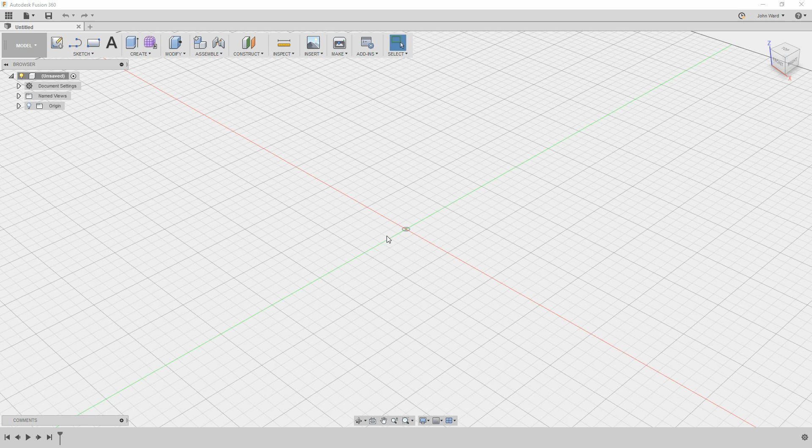Now what we've got here is Fusion 360, and this is the default view when you've just opened up a new project. The first thing we need to do is to actually draw the base of the machine, and this is essentially just a rectangle - basically a sheet of melamine faced chipboard. So we're going to start by going up here to the left, and we're going to pick a rectangle because that's what the machine is, and this guy's going to do a center rectangle.

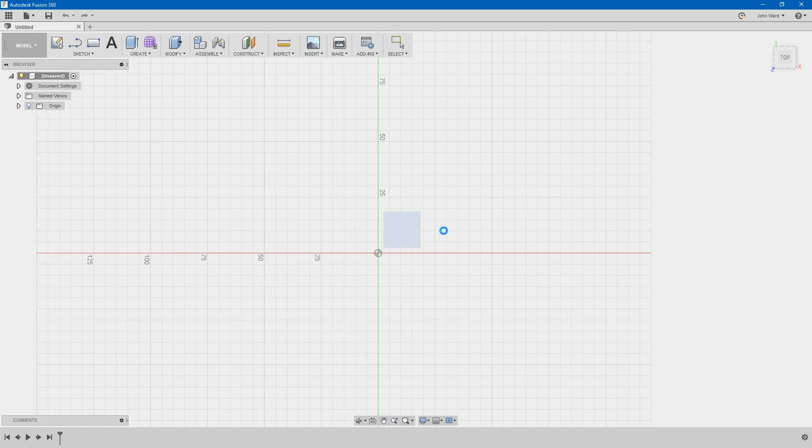Now we have to pick which plane we're actually going to draw this on, and we've got a choice of 3, as this is of course in 3 dimensions. So I'm actually going to select the base here, and we'll see it will just move into that automatically. So this is actually the XY plane, because the thing is on the base of the machine. Also the Z is the vertical in this case.

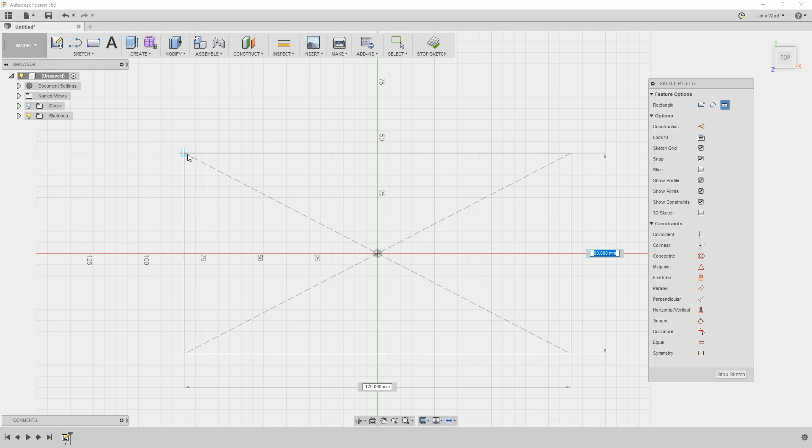Now for this rectangle I just need to place the centre, which we're going to place at the centre of the origin. So we'll just click there, and then we just drag out, and we'll see we have a rectangle. Now we can actually type in the sizes here, so the sizes we want in this case - the height is actually 740 millimeters, and the width of it is 1110 millimeters.

So just press enter there after entering the dimensions, and we can obviously zoom out and see we've got our rectangle. See the edge is actually black, which means it's now what's called fully defined, which means we've actually specified the actual dimensions of both sides. If it wasn't black, then it means we haven't actually done that yet. So 740 that way, and 1110 in the other direction, and that's basically the size of the base of the machine.

And in order to find out the size, you just get out a tape measure and actually measure the thing. It really is as simple as that.

Now there are 3 other elements I want to draw in here, which are the supports that go across the ends here, and also in the centre. Those are also rectangles - strips of steel which go all the way across to support the base. These are also rectangles, so we can draw those in with the rectangle tool as well.

So we've got the rectangle there. In this case we'll use the 2-point rectangle, which will allow us to line this up with the one we've done already. If we move in at the top left corner, you'll see a blue square appear, meaning it will snap to the corner we already have. We can click there and move down to the bottom, and we'll see a little cross at the bottom, meaning again it's snapped to that position.

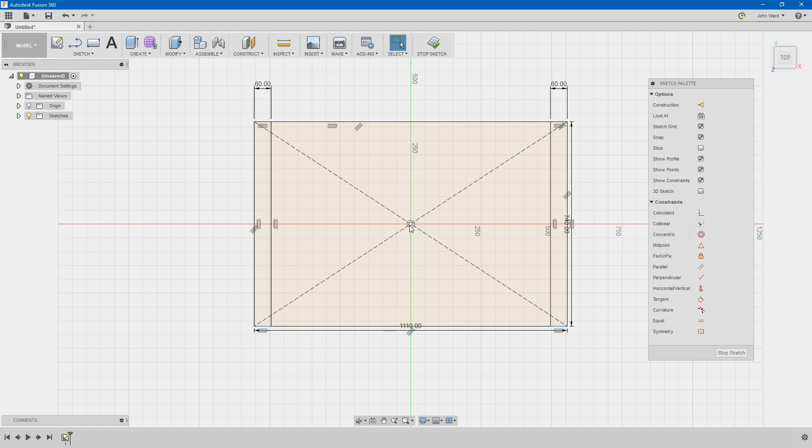Then we need to do the one in the middle, which is centered, so because we started the other one in the center, we can do likewise with this one. We'll go to rectangle and use the center rectangle again, starting in the center, then expand out. The width is going to be 60, and the height is already 740 because we snapped to the top line. So we type in 60, press enter, and we have the 3 pieces defined.

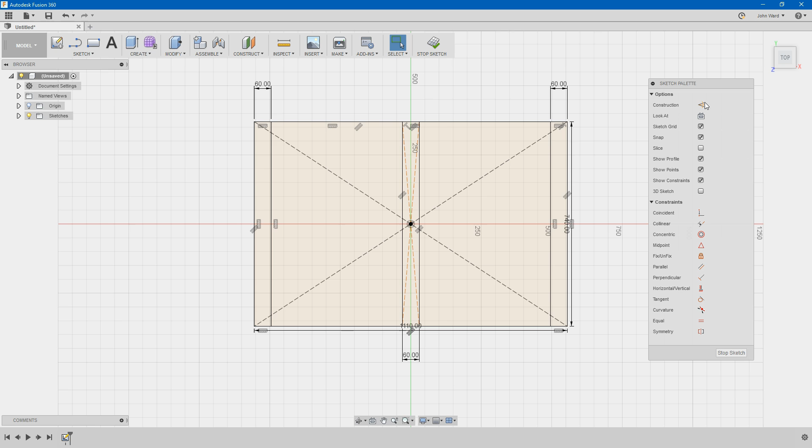That's it for the base of the machine, so we click over here on the side panel and put stop sketch, which finalises what we've done. It's zoomed in rather a bit, so we'll zoom out. This is the base of the machine - the rectangular top piece - and then we've got the additional 3 rectangles which define where the pieces of steel are underneath.

Now in reality the bits of steel actually extend beyond the base here. That doesn't matter because we're not concerned with that, and we could in theory model up the rest of the machine as well, but again we don't really need to do that.

Now at the moment we've only got a flat sheet, so we need to add some thickness to this. We need to extrude this to the thickness of the base, which in this case is 20 millimeters. To do this we use the tool - we could go up here and find it, but the keyboard command is actually Q, which brings up press pull.

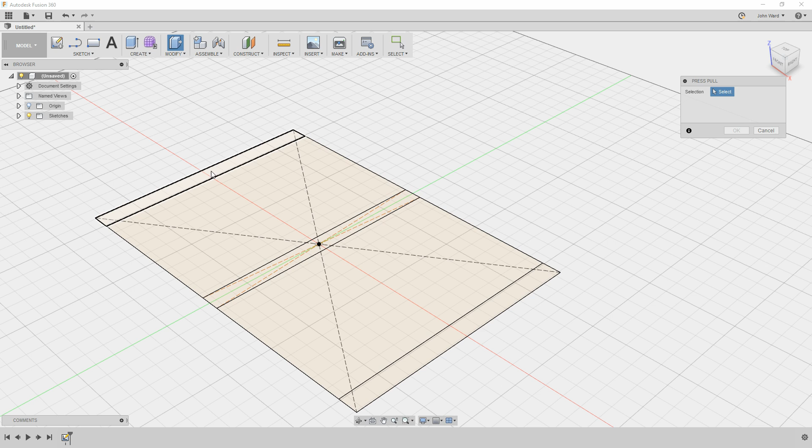It says selection, so it's asking us to select what we want to extrude. We'll select this one, and in fact all of them on the bottom because they're all basically connected. Then we can pull on this little thing here, which moves it upwards as required, and we can type in the box the precise distance we want - in this case it's 20 millimeters.

Press enter, and there we have our base plate, which now has some thickness to it. If we rotate that, you'll see it's basically 20 millimeters in thickness, and of course the size that we defined earlier.

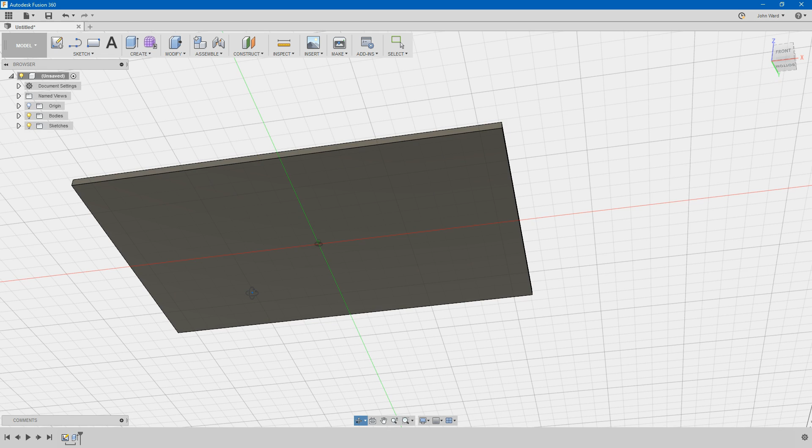And we can also look underneath as well if we wanted to, and you'll see it is centered on the origin there which we started from initially. Just click the little home thing up there, that will go back into place like that.

Now the next thing we need to do is put some holes in it, so we can of course drill the holes in. That was the whole point of doing this. So first we need to draw one of the holes, and holes are round, so we can do a round circle, and that's actually C on the keyboard.

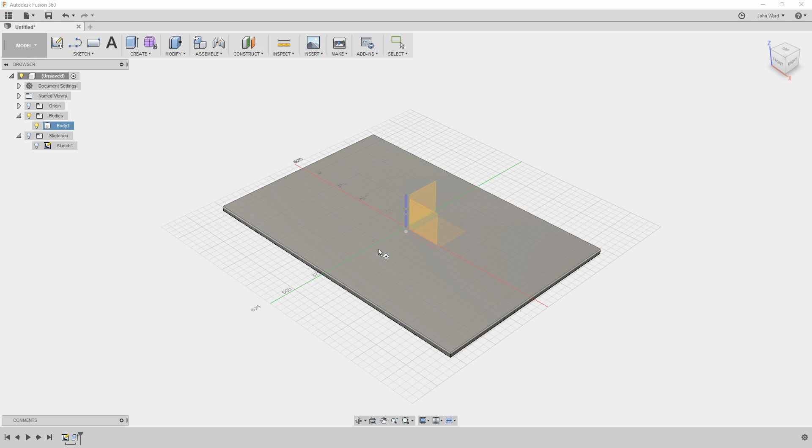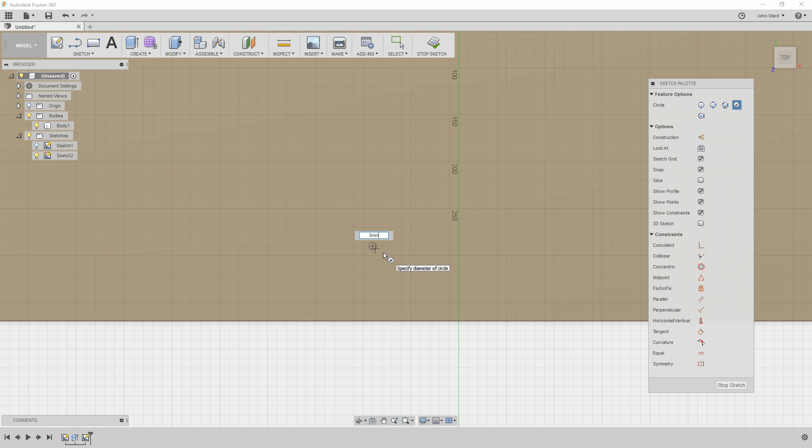So if we just click on there, and then select the object in question, it automatically goes to that particular view. If we zoom in a bit here, we can draw the circle just by clicking here and then dragging, and you see we adjust the size. But we know it's going to be an 8mm hole, so we can just type in 8mm, and then we have our 8mm circle, which we've just drawn on the top there.

Now at the moment that's just an 8mm circle floating about in the middle of nowhere, so we need to specify exactly where it's going to be located. If we go over here to the left, we can turn on that sketch that we had previously. We can just see it peeking through underneath.

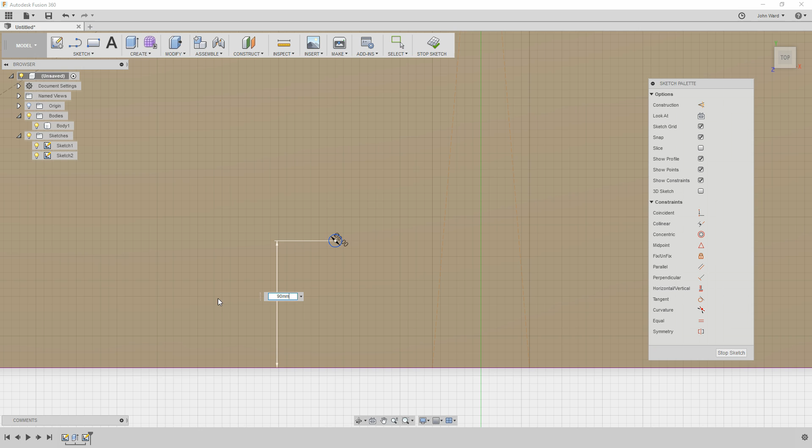So if we now press D for dimension, we can click on the circle and then click on the edge of the actual material, and then we get this dimension thing showing up here. We can position it wherever we want, so over here will do fine. The distance we want here is actually 90mm, so type that in and press enter. The reason for 90 is that the piece of material is 740 wide, and if you divide that up into 80s you get a certain number across with 90 at each side, so that'll make it nice and symmetrical on the other side.

And then we need to specify the dimension across here as well, because again it's just floating there. So again we click on the middle, and because we turned on the sketch we did earlier, we can just see it showing through from underneath. So click on that one, and again there we've got our dimension here.

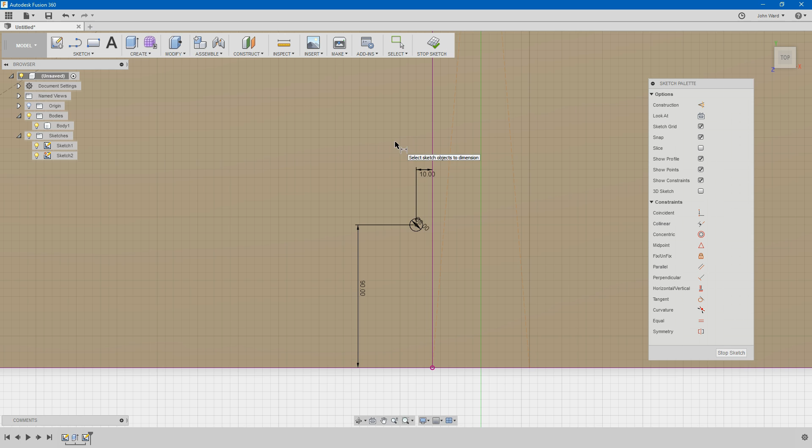In this case we need to type that in, and it's going to actually be 10mm, and you see it automatically moves into position. The reason it's 10 is because we want these at 80 spacing, so we have a 10mm space here. This piece we can see underneath is the 60mm wide piece of metal, and then when we put another one on the other side it'll be 10mm there, and that will give us the 80mm between and avoid drilling into the metal piece.

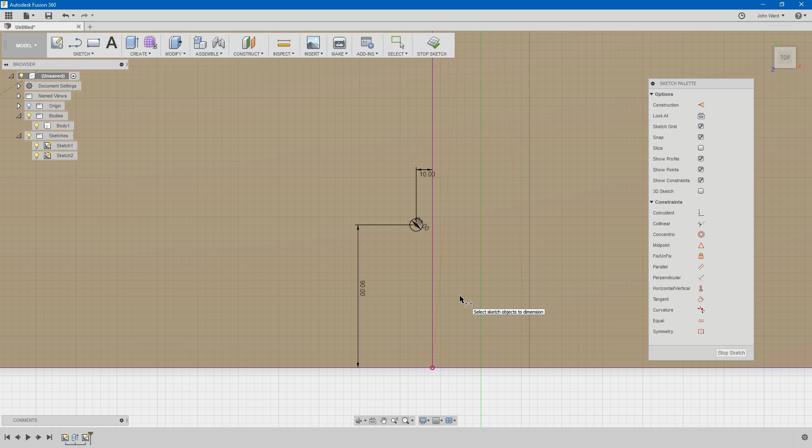So that's the end of that one, so we can just click on Stop Sketch over there, and then that just goes back to what we saw previously. And if we turn that on, we can see there's the little hole we just drew, and the various things underneath we drew previously. So that's all working as you would want.

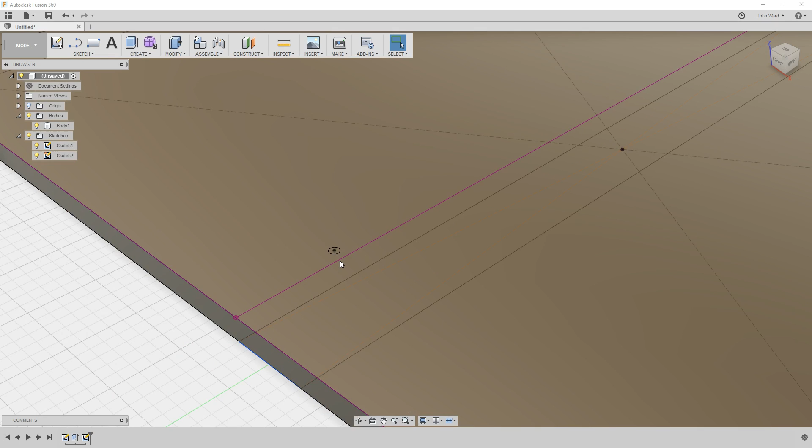Now, of course, that's only a circle at the moment, it's not actually a hole, so if you go and look at that, you see it's just a circle on the top, there's no hole involved there. So we need to make that into a hole, and we can use the Q command again, or press pull, so just press Q like we did previously, and if we go in there, then select the circle that we made, and now we can actually turn this into a hole.

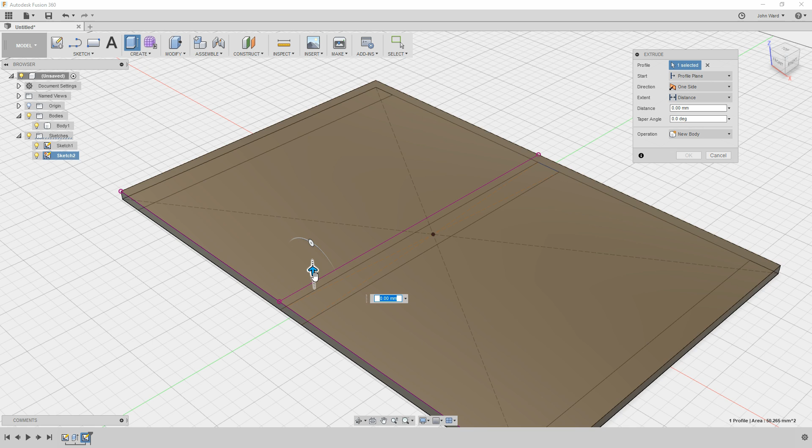Now, the arrow is actually for the direction, so if we scroll in there, we don't want to pull it upwards because that's basically the wrong direction, so we go down through the material. We could just leave it at -20, as that's the thickness of the base, but if we go up here to the panel on the side, it says extrude, and we're going to start at the plane, which is basically on the top where we drew the thing.

Direction is one side because we're just going in one direction, and instead of having distance as extent, what we can actually do is put all. We could have also used 'to object' in this case, but we'll use all, which means it will go all the way through all of the objects or things it finds in the way. So that will automatically go all the way through. We don't have to necessarily type in the dimension itself.

Now in this case it doesn't matter at all because we've only got one, but if it was a more complex thing with dozens or even hundreds of different components, by specifying that, then if we change the dimension to say the thickness of this, all those holes would update automatically. We wouldn't have to go in and amend them individually.

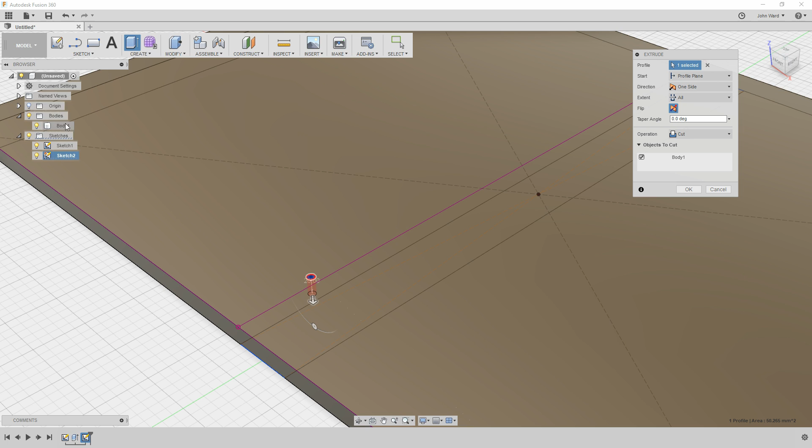Operation at the bottom is cut. There's some others there which we're not using here because we basically want to cut the hole through it. And the objects to cut is basically the thing we're cutting, which is this body one we made earlier. It's the base of the machine. So we can just click OK there.

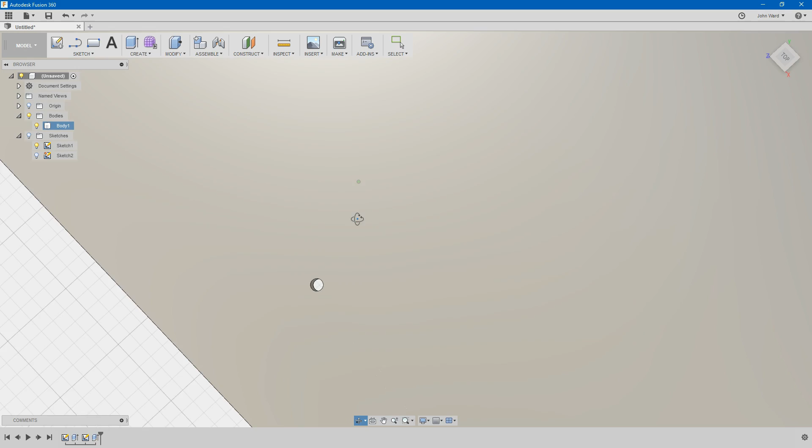We can then turn off the sketches because we don't really need those anymore. And now the circle we had is now actually a hole, so if we zoom in there, you'll see there's actually a hole that goes all the way through. If we just rotate the model, we can see through the hole to what's underneath. And if we look at it from underneath, there's the hole going all the way through.

Now one hole's all very well, but we need a lot more of them, and we could draw them all individually and align them up carefully, but that's going to take far too long. So press S on the keyboard and then we can search for a pattern command, and we're going to pick rectangular pattern. Now it's obviously a rectangle, and then we get the pattern box up here.

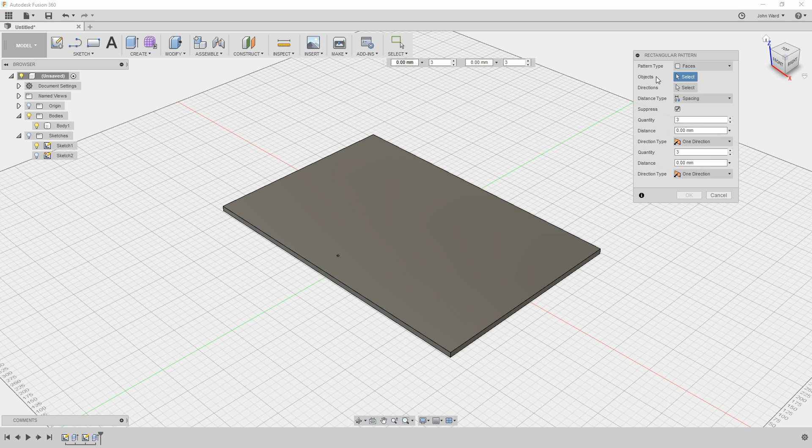Now first of all we need to select what we're going to make a pattern from, the object, so in that case it's going to be that hole we just made. So just zoom in a bit and pick the hole. In terms of these, this is how far apart they're going to be, or the space between them, as we've got spacing here, and then how many we actually want.

We also need to select the directions we're going to go in, so we'll just say that direction and this direction, as we want two directions. So we're going to go for the spacing as we had before, 80mm, that was also the whole point, and we'll go 80mm in that direction.

Now it starts out with 3, and we'll see that these are actually going in the incorrect direction here, so rather than 80, we'll just change that to -80, and you'll see it goes in the other direction.

Now I'm going to leave that one at 80, but if we change the other one in the side box here to 80, it will then go across the plate like that. Now we need obviously more than 3. Now this thing here, by the way, and these up here are basically the same. You can just do it there or up here, it doesn't actually matter.

So we need to increase the quantity that we have. So for this one we'll just turn these up a bit, and you'll see it will just expand the pattern across the grid. We want to go as far as we can without going right to the edge, so that particular one is going to be 8, like that.

Notice that says one direction on both of these. Now that's fine for the direction here, but the other one we can change to symmetric. That means it goes on both sides of the starting point, so when we increase that one, see, it will fill in on both sides of the grid like that.

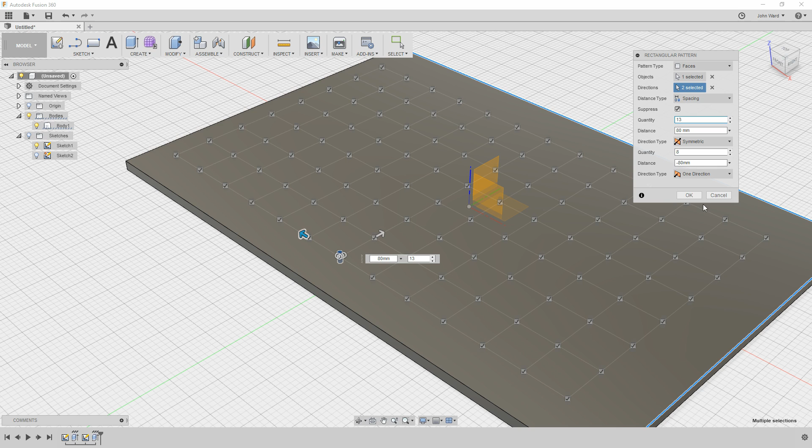Now that's pretty much all we need there, so if we click OK, then we can see we've got holes now all across the grid, and if we have a look from the top view, we can see it's a nice rectangular grid of holes, all spaced out and aligned as we would expect. And if we turn on the sketch again, we can now see that the middle is obviously avoiding drilling the holes there.

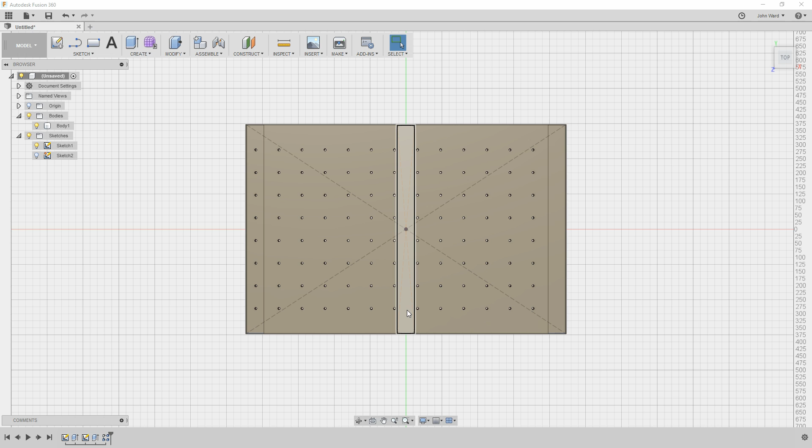It's just nicely spaced either side, as we put the correct spacing for this hole in before, and that's been basically duplicated across to all of the others. We can see all the holes there.

Now there is a bit of a problem here, because at this end we've got a whole row of holes across the top piece of the metal, and it also happens that the machine can't even reach that far to drill them, so we need to actually get rid of those.

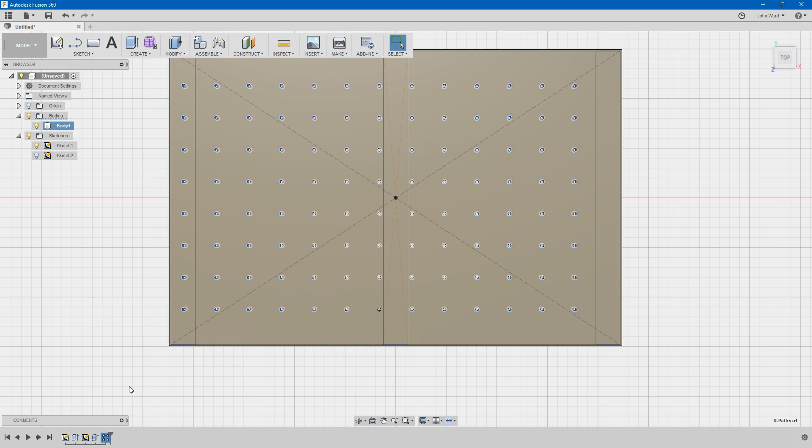So if we go down here to the bottom left, we can just click here and put edit. Now because we've got suppress selected here, we can actually just untick the ones that we don't want, so we'll just get rid of a load of these, as we can't drill there because it's obviously solid metal.

And we'll actually take out these two rows as well, mainly because the machine can't actually reach to that position, because the gantry is one-sided with the spindle overhanging. So we'll take those three rows away, but we'll leave all the others in position so that it will fill up that spacing.

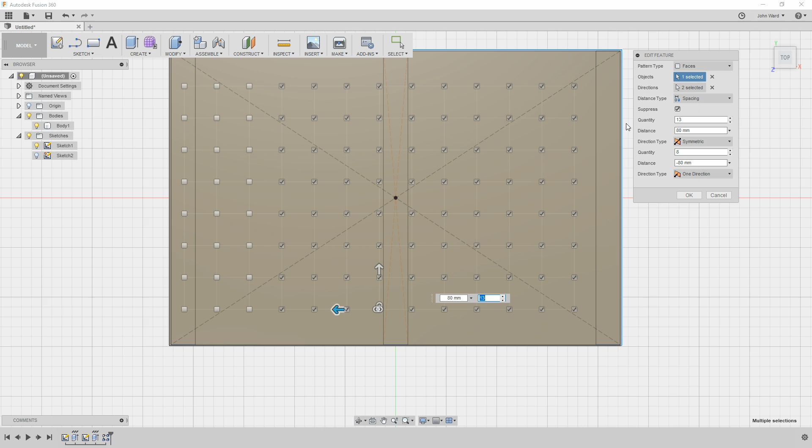And we don't want to go any further to the right here, because if we did, again it would be into that metal area, which is what we want to avoid. So click OK there, and then we get our holes in a more sensible place.

And we can turn off the sketches now and just see the whole thing as it's finished. And if we zoom in there, we can of course see that they are in fact all holes going all the way through.

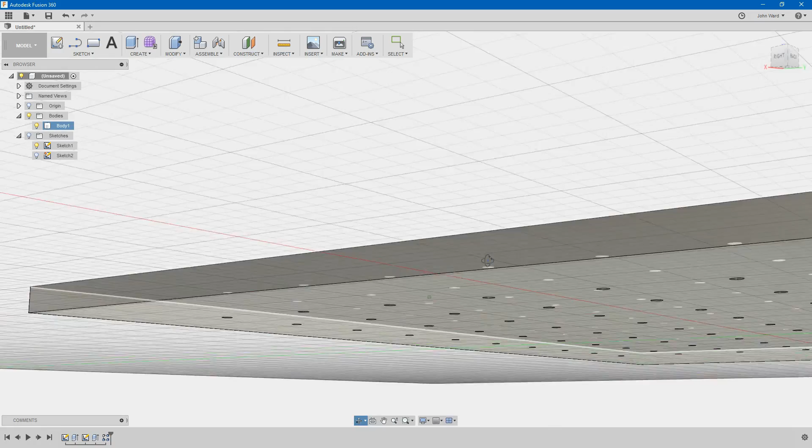And if we look from underneath, well, there's those holes again. So that's the thing we actually want to make.

And although that took quite a long time in this video, in reality it wouldn't take very long at all, because all you're doing essentially is drawing a rectangle, extruding it to 20mm, drawing a circle, extruding that through the material, and then just making a pattern to copy the hole all over the thing like that.

So the next thing is to actually set up the machining parameters for this, and if we go to the top left here where it says model, we can then change to the CAM option down here. And you see there's quite a lot of other options in here, things we're not currently using. So we'll just click on that.

Looks pretty much the same, but the difference is on the left here we've now got a whole load of different things, and this is where we're going to set up for the actual machining process.

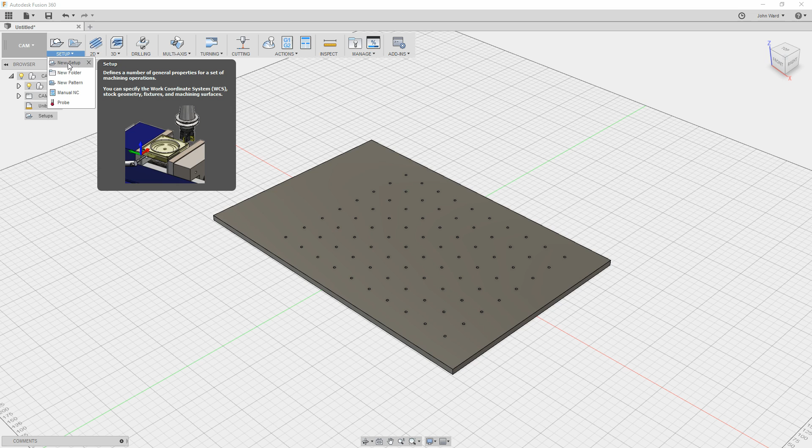So the first thing we need to do is create a setup, and if we click here where it says setup, we can go to new, and as it says there, it just defines a number of general properties. So we'll click there, and then we get this box at the top here where we can select various things.

Now operation is going to be milling. We could have turning or cutting or whatever else, but we don't have plasma cutters or lathes here, so milling it is.

And then we need to actually select some kind of origin point here, so we can then define basically which direction is which. In this case Z is correct, but Y and X are actually the wrong way round, so we need to attend to that. And we also need to select where the actual origin or 0 point will be.

Currently it's in the middle, but we are going to want to be moving that to down at this corner.

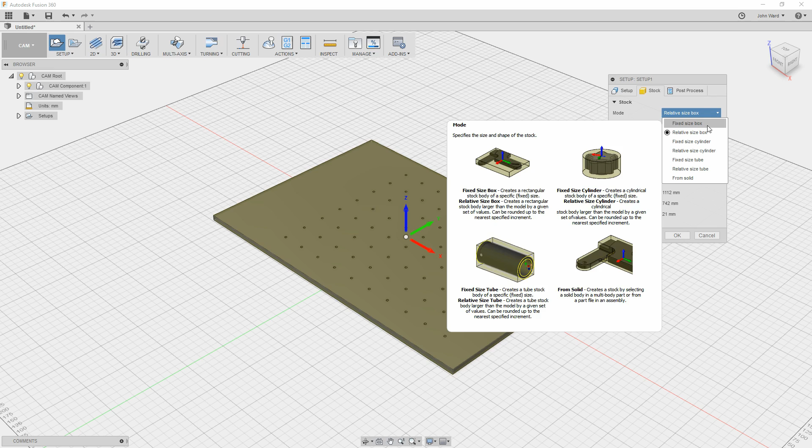Now if we go to the stock tab up here, we need to change this, because what we actually want is a fixed size box, and the box is going to be the exact size of the thing which we're making. So in this case 1110 by 740 by 20mm.

The other ones are useful if you're going to say make a part and then cut parts off of the starting stock, but in this case we want it to be the exact thing, and then we're drilling holes in it, so fixed size box is what we want.

Now for the origin we need to set basically where the middle of this thing is, which is currently in the centre, but we need to actually locate it to this hole. The reason we're going for that hole is it's easy to measure from the edge here and here on the actual machine, so we can easily locate it there accurately.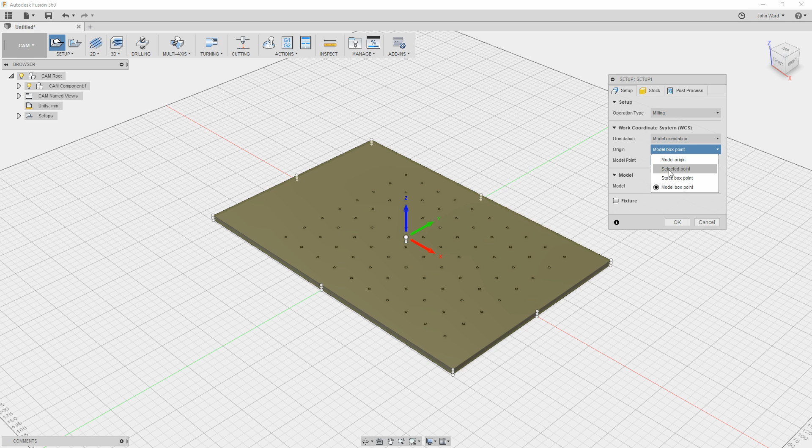So rather than model box point, we're going to put selected point, and then we can go and select. I have to zoom in a bit there. We can select the hole there which we made earlier. So just select there, and then that will basically become the 0 point. So we can line the machine above the hole and flat with the surface, and then that becomes our 0 position. Again, that's easy to get because we can simply measure from the edge here and the edge here on the actual machine.

Now the model orientation is actually slightly wrong, because though Z is in the vertical direction, Y and X are the wrong way round, so we can change that from orientation here, and select the appropriate options. So I've just changed the arrangement there, so basically X is going across the table, which is the moving direction, and then Y goes along here, and Z is in the vertical direction, and you can do that just by selecting the edges and whatever in there.

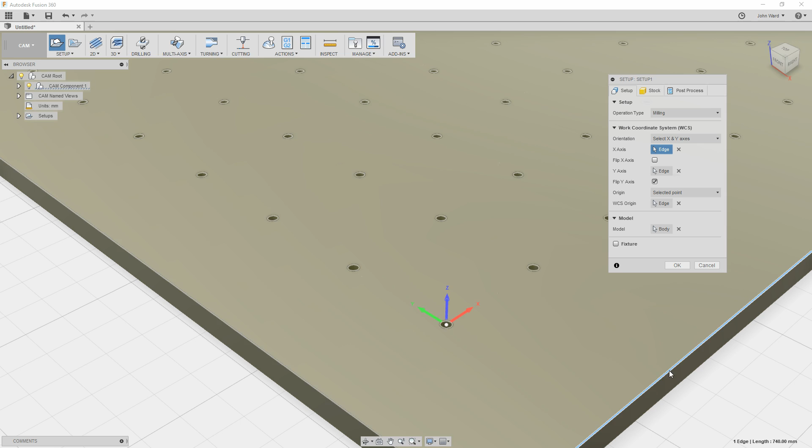And post-process, we don't have to really put much in here. You can put a program number in there, 1001 will do, and the rest of this doesn't apply, so we'll just click OK.

So now we have our piece of base here, which is part of the machine in this case, all the holes there, and this is the start position, basically 0, 0, 0, and we've got our 3 directions going in the correct places, so X over there, Y along the longer length here, and Z is the vertical direction. Now the next thing we need to do is to pick some kind of machining operation.

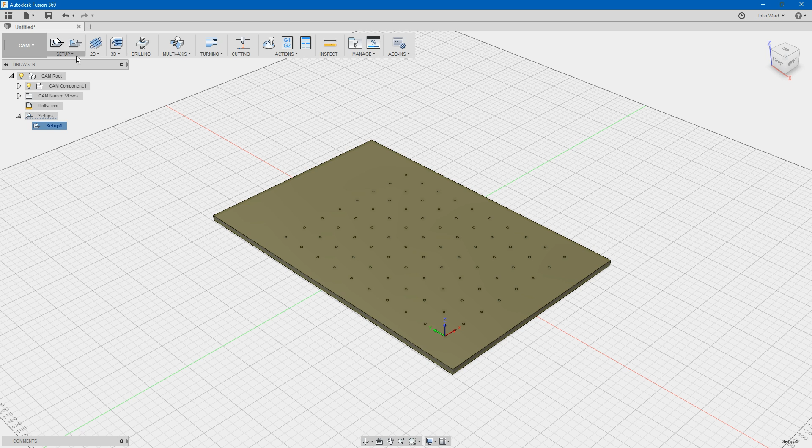There's a whole load of these up here, 2D, 3D and so on. And in this case we're going to pick drilling because obviously we're going to be drilling some holes, so just click on drilling there, and then we get another one of these things over on the right for drilling. And just as with the other ones, you've got various tabs here, and you just start on the left and work across and work down each tab.

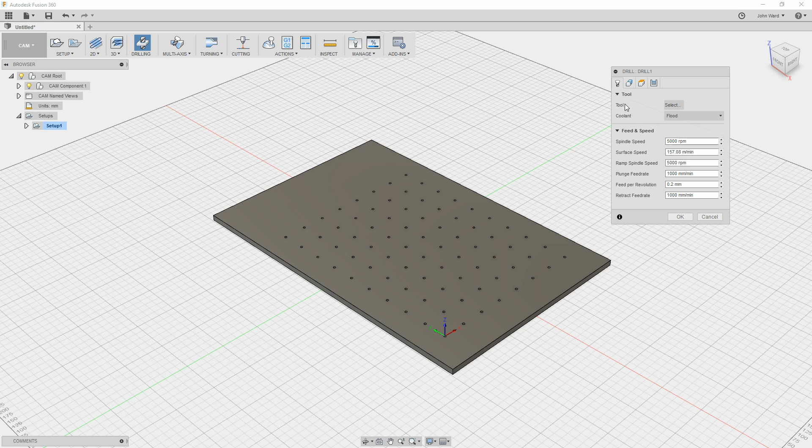So first of all we need to select an appropriate tool to actually do the drilling, so we just click on select here, and this will open up the tool library, and inside there's a whole load of sample tools and all kinds of other stuff, but I've already got one in here, a drilling demo. I put this in earlier, and basically it's just an 8mm diameter drill, and if we click on that we can then see the details over here.

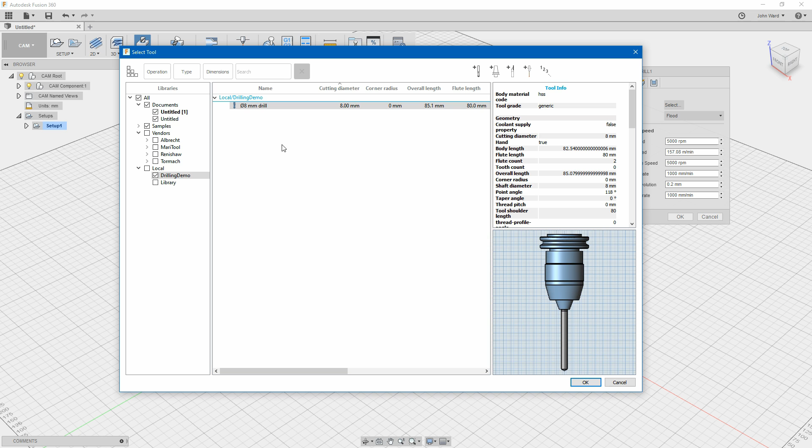Nothing particularly spectacular. It's made of high-speed steel, it's just some generic thing. It's 8mm in diameter, and then we've got various things like the length of the actual drill bit and the shaft and how many flutes it's got, which is 2 in this case, angle of the point, and a whole load of other stuff in there, most of which we don't really apply in this case, and the type of tool holder and all kinds of other stuff. There's a lot of tools that come with Fusion 360, and you can obviously add your own in there as well, and even download them from various manufacturers, but this is just a generic item.

If you just double click on this, we will select that, and you can edit your own tools as well if you want to. So that gives us the drill there. Coolant is disabled because we don't want any coolant. This is a piece of chipboard we're drilling, so we don't want any coolant flooding, and the machine hasn't got it anyway.

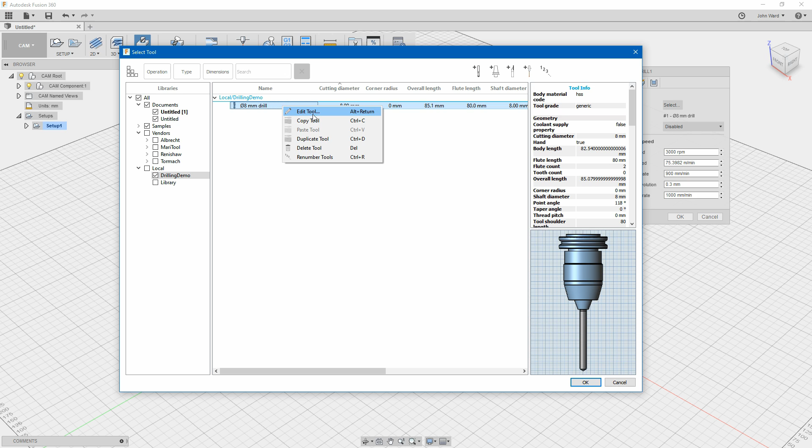And then in here you've got the various speeds, so the speed of rotation is going to be 3000 RPM, and it's going to plunge in the material at 900mm per minute, and some of these are also calculated from the others. And these are actually set up in the tool parameters, so if we go back to that tool, and if we edit tool, then we can see in here that it's all defined already, so this is just basically a generic 8mm drill which I picked from the library that was there already.

So you see it's now put the little drawing of the tool on the model we have there.

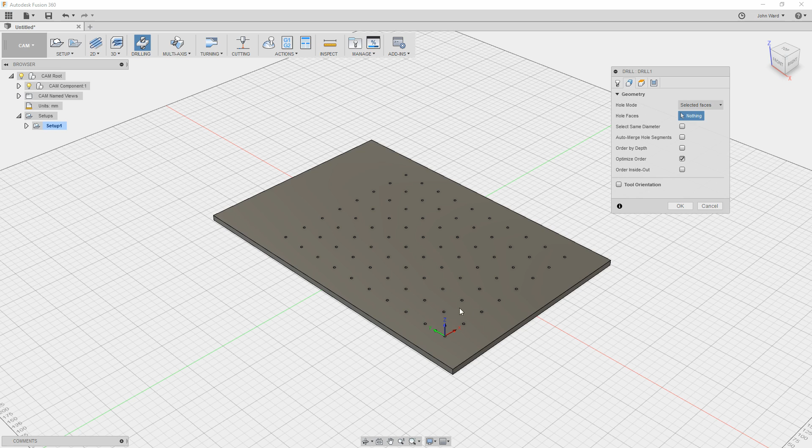Now moving on to the next tab, which is geometry. This is basically selecting what it is we're actually going to be drilling. So we've got the thing we're going to drill with, now it's a question of what are we going to drill. Nothing is selected at the moment, which of course is useless, so we need to select something.

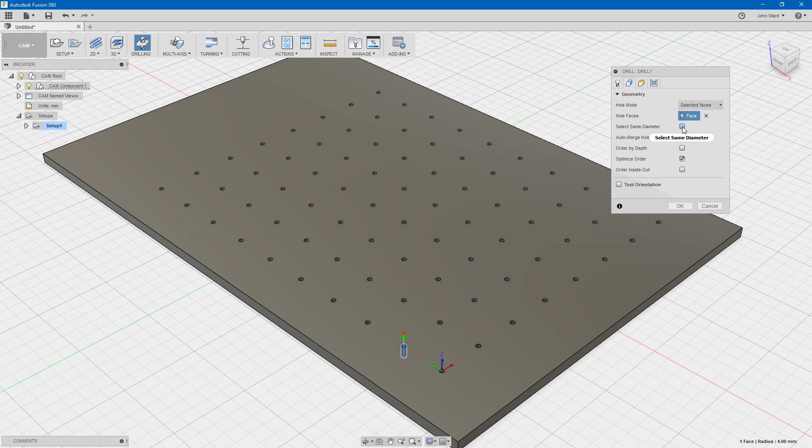If we zoom in a bit, we can just pick one of the holes. This hole will do for a start. Now we could just go and click all the holes individually, but surprisingly enough that takes too long. So over here we've got where it says select same diameter, so if we were to just click there, it automatically selects all of the holes of the same size, which in this case is all of them because they're all the same size.

And you've got some other options here as well, so most of those don't actually apply here. Optimize order is turned on, so you see it's going to start there and do these in a fairly square pattern, and then for some reason go over here and then finish there. Not entirely sure why it's put that long move in like that, but anyway.

If optimize order is not on, then it may well just pick some other weird pattern, which is certainly far from optimal because it's going to sort of go and dodge about here and do all kinds of weird stuff, although that's not actually too bad. One I had previously was literally, it looked like a complete pile of spaghetti. But optimize order should put it in a more sensible arrangement.

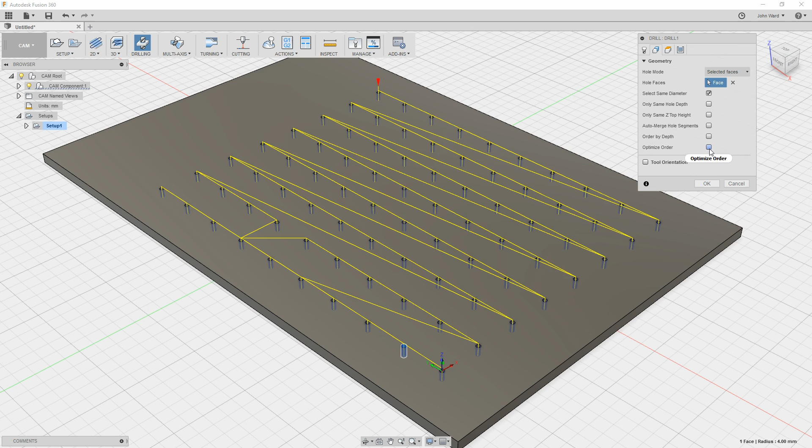The previous video, actually, when it was drilling, had the option of order inside out turned on, which means rather than starting at one edge and working across, it starts in the middle and goes around in a sort of circular pattern. It doesn't quite work because it's square, but you get the idea. And that's just an option we've got there.

And we don't need the other options there, so moving on to heights. Now this specifies the various heights that the drill is actually going to be at, and we've got a whole lot of these down the side. Now if we start down at the bottom here, the bottom height, in other words where it's going to drill down to, is essentially the bottom of the hole, which is not too surprising.

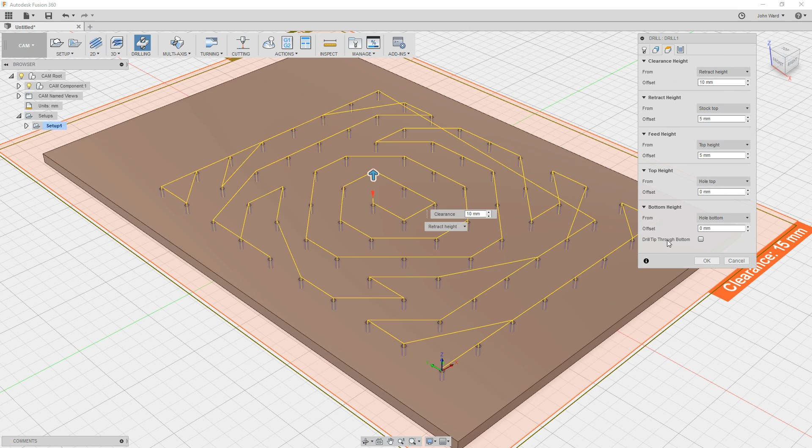You see a little diagram there, and in this case we actually want it to go through the bottom of the hole. We're going to add a little bit of an offset there, so we're actually going to put here 2mm, and if we put that in there, it will actually go through the bottom of the hole, and we can see the little diagram here. So you see there, rather than just stopping at the bottom of the hole, it will actually go slightly through the hole just to make sure it's completely cleared through.

The top height is unsurprisingly the top of the hole, so that's where we want to start drilling in. And some of these others here, if you just put the thing over, it tells you where they are from. The feed height is essentially where it goes to before it starts plunging into the hole, and that's actually 5 millimeters above. And the retract height is also 5 millimeters, so that's basically where it goes up to before it moves to the next path, as it says there.

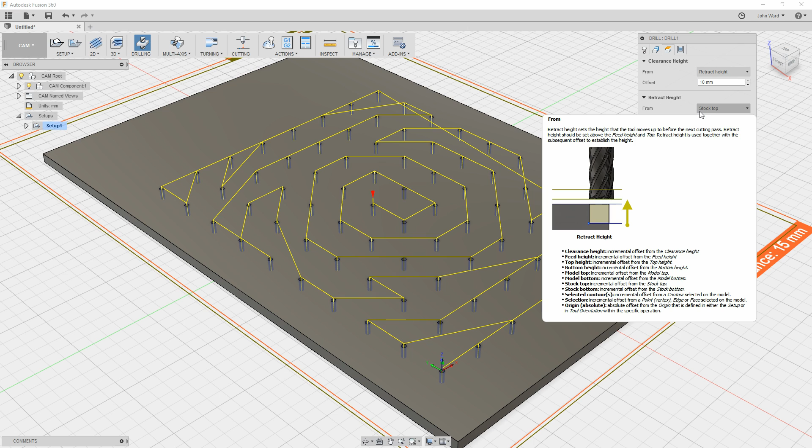Now in this case most of these don't actually matter because we're just drilling into a flat surface, so there's no issue with it colliding with the other items, but if you had a more complex shape or with 3D things on it, then you would need to make sure that that was above the height of anything else on the table, otherwise when it moved it could smash the drill bit into the side of some other feature. And then the clearance height is where it goes to when it's moving at a higher speed.

So most of those we can just leave as they are, and then moving on to the final tab, which is cycle.

And then we have some different types of drilling here. We've got drilling rapid out, and if you put the mouse over this it will tell you what all of these actually mean, so you can pick those. In this case, we're going to take deep drilling full retract, which retracts completely out of the hole to clear chips and/or flood the hole with coolant.

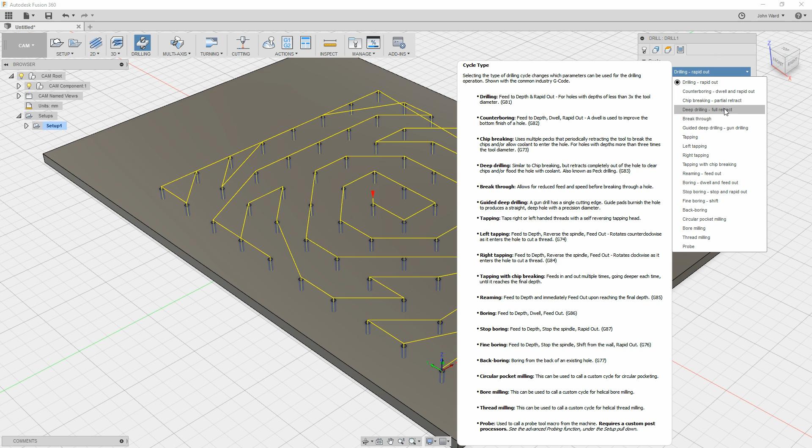If we click that, it's going to go into the hole to a certain distance, then come out of the hole, which will clear away any of the chips, which in this case are going to be shredded up chipboard, and then it will go back into the hole again to complete the hole. If it was a very deep hole, it could do that several times, avoiding it being clogged up with chips and things inside.

Now we're only drilling through chipboard here, so it's probably not necessary, but I did set it anyway in the other program we saw previously, just to make sure there was no danger of it getting bound up or stuck in there with anything it's drilling out.

So on this one I actually set the pecking depth to 15 millimeters, bearing in mind we're doing a 20 millimeter hole. So it's going to go into a depth of about 15 millimeters, pull out again and clear the hole away, then go in and do those last 5 millimeters to go through the bottom. Also remembering it's going to go through an extra couple of millimeters we set on the previous tab, just to make sure it clears right through the bottom and the hole is all the way through.

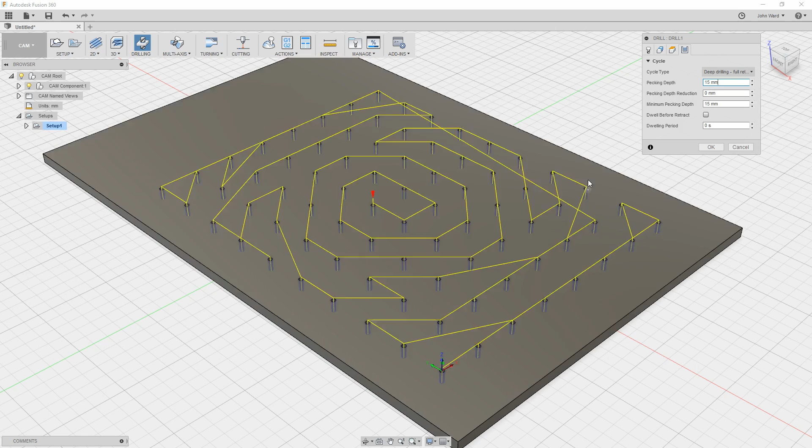And we don't need the other items here. We could select if it's going to stay in the hole for a period and then come out, but that's just adding time, so we don't need that. So we're at the last tab, we can just click OK, and that has now created the tool path which will drill all of our holes.

We can see this in action by going to the simulate option up the top here. Let's click on that, and it's now drawn in the representation of the drill and the thing it's going to be installed in. If we click on the play button at the bottom of the screen, you'll see it go around and give an indication of what it's going to do on the real machine.

And you can adjust the speed as well. If we crank that up a bit, it goes around a bit faster. That's obviously much faster than it's going to do it in real life.

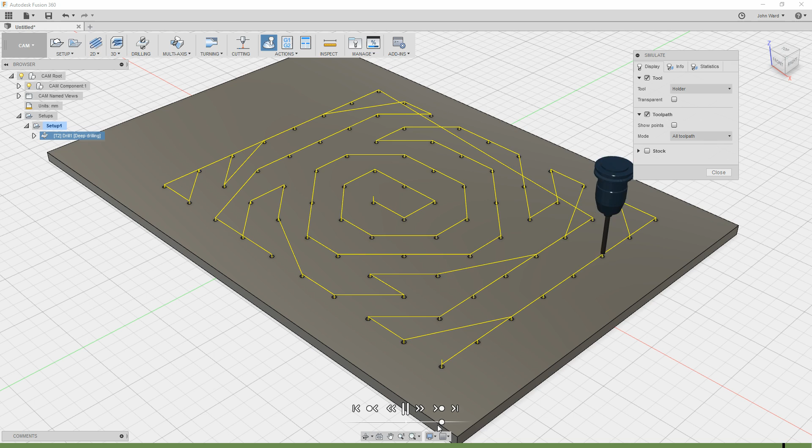And as you see, it then gets to the end. Just slow it down a bit there, and it comes to the last couple of holes. And that's that. Then eventually it returns back to the couple of holes on that side, and then it's finished. So that's right through the middle - it's not quite circular because when it gets to the edge the circle isn't quite right, since it's rectangular.

But anyway, you get the idea, and if you have a look at the other video you'll see how that worked in practice. Now while it's actually doing that, you'll see at the bottom of the screen here there's this green strip, and the little black thing is its current position.

If you see any red bits in the green strip here, it means it's colliding with something, and you will definitely want to go and change that before doing it on the real machine, because if it's colliding with something it means the tool's going to get broken off, or the machine's going to get damaged, or something similar is going to happen.

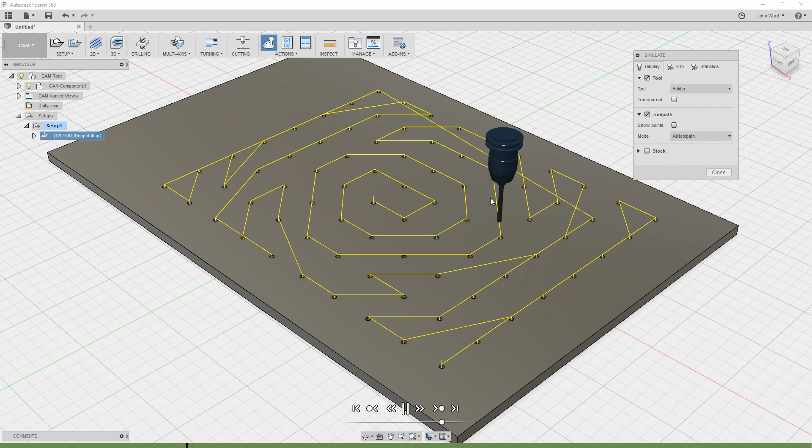In this case there's nothing to collide with, but if you had, say, a number of complex shapes and other things here, it will actually detect whether the tool is going to mash into something you've already cut, for example, and show that at the bottom in red. So a very handy feature to use, rather than go to the machine and find out it's going to mash into some component and the spindle is broken in half.

So that's pretty much there, so we can close the simulation bit there because it seems to work as expected. And then the final step is to actually create the file which is going to be taken to the machine.

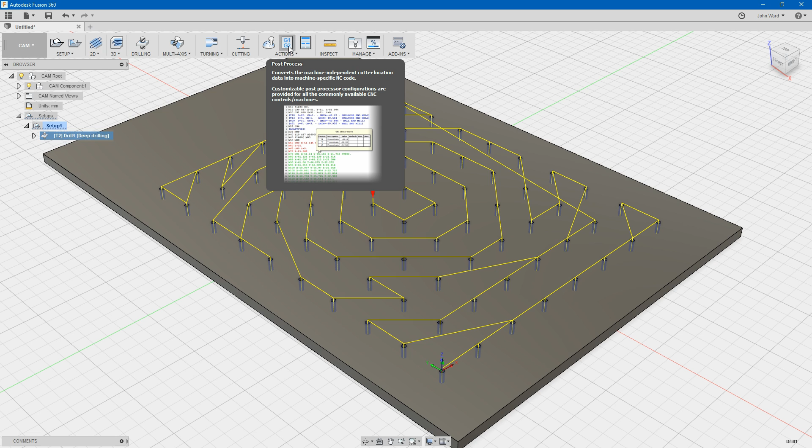So in the actions here we've got post process, and it says there it converts it into the code that we want, and that will open up the panel we've got here. Now there's quite a lot of options in here. The top one is basically where the configuration folder is located. You can obviously change that if you want to.

And in the selection here we've got a whole load of different things to pick from, and a lot of these are basically for different machines from different manufacturers and all kinds of stuff in there. The one we're going to be using here is the Mach 4 mill, and this was not actually included with Fusion 360. You'll see there's also one in there for Mach 3 and even Mach 2 as well.

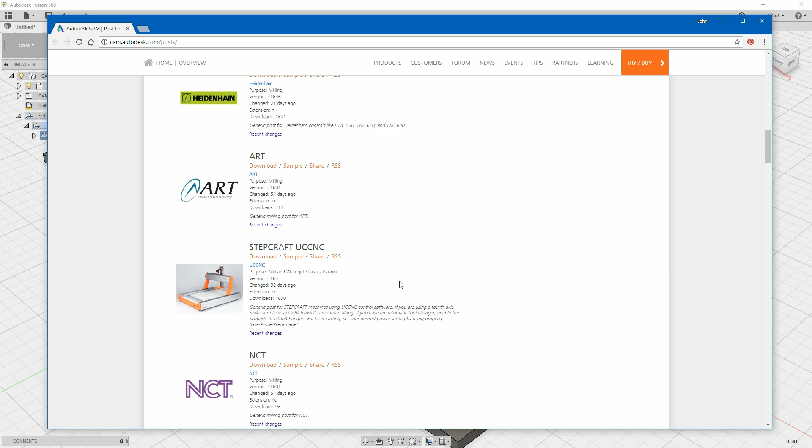But if you can't find what you need in there, then all you've got to do is click here where it says search for posts in our online post library. Just click there, and that actually goes to the website, as we can see here, and then it's simply a question of downloading one of these as appropriate. There's quite a lot of these in here, for different manufacturers, different types of machinery, and all kinds of things like that.

So in this case it was the stuff in Mach there, and it was the Mach 4 mill that we used, so just a question of downloading that and stuffing it in the folder, and then we can use that one. It says generic milling post for Mach 4, and post in this case means a post processor, not a bed post or something similar. So that's all we've got there.

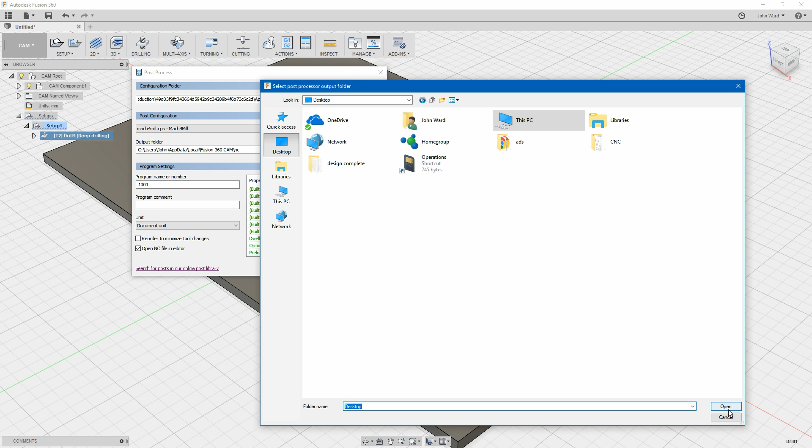Then we can choose where it's going to save the file. In this case I'm just going to stick it on the desktop because that's easier. Program number you can change to whatever you want, so we'll just leave it as the default in this case, and you can put comments and things in as well, no problem with that. There are some other options in here, as you can see on the side, and we're going to leave all of those as default as well, including G28, which we'll get to in a moment.

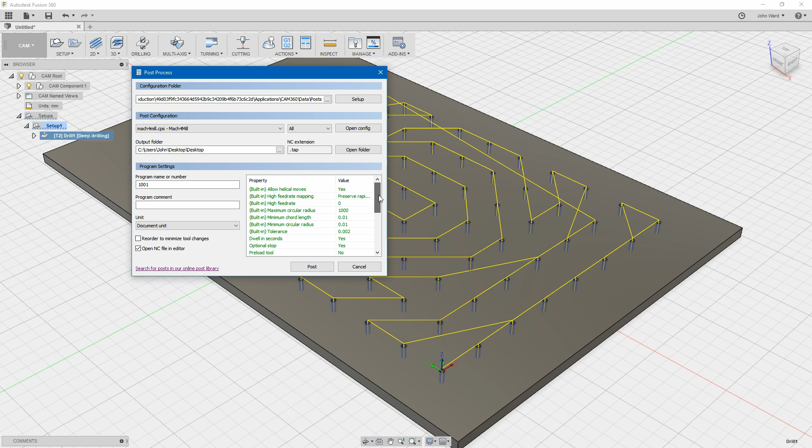And then all we've got to do basically is press post, and that will generate the file. Just asking where to save it, so it's on the desktop there. We'll stick that there, and then it will actually open the file as well, so we can see what's inside it. So here's the file it's just created, and there's that 1001 at the top.

Basically anything in brackets is a comment, so it's just for reading purposes. In this case it's program 1001, and this then defines the type of tool we're using. As you can see, that's a drill diameter 8, 118 degree taper, and various other factors in there. And then the actual code starts on line 3, and you'll see here why it's called G code, because there's the first command G90, and then G94, and so on, and then that just goes down there.

That top part is basically a bit of setup. The G28, G91, Z0 is essentially retracting the spindle to the maximum height, which in this case is 0, because bearing in mind if it's at the top it's 0, and as it moves down it's negative. That basically puts it to 0 for safety, so that it puts it as high as possible first before moving it to the location. That avoids it smashing into things and breaking stuff.

And down here then we've got the spindle being turned on, which is this M3 S3000 line. A lot of these here have to do with coolant being turned off, which we obviously don't need anyway. And then it's setting it to the various coordinates here, and then the drilling part is actually this line here with the G98. So that line there is the actual drilling operation, and then that is basically repeated for all of these coordinates all the way down the list here.

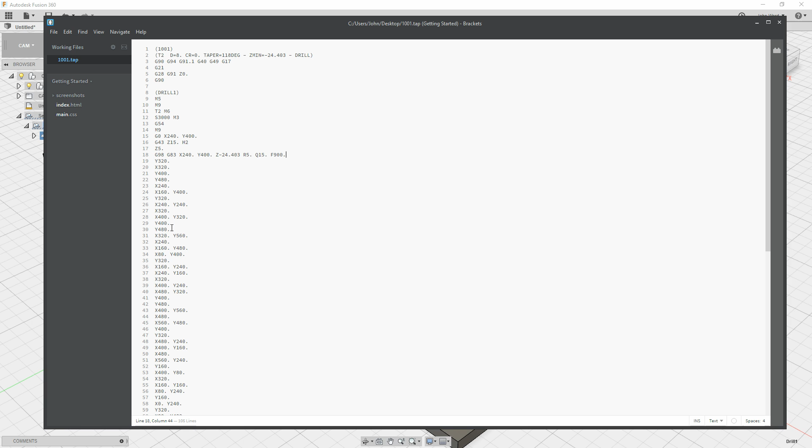This is basically the code you would just take directly to the machine and shove in there, and this does the job. So that is essentially how the entire thing works. Although this is a fairly lengthy video, it's quite quick in reality to design that up and do those things, because when you're not describing stuff it's much quicker than actually describing every single step.

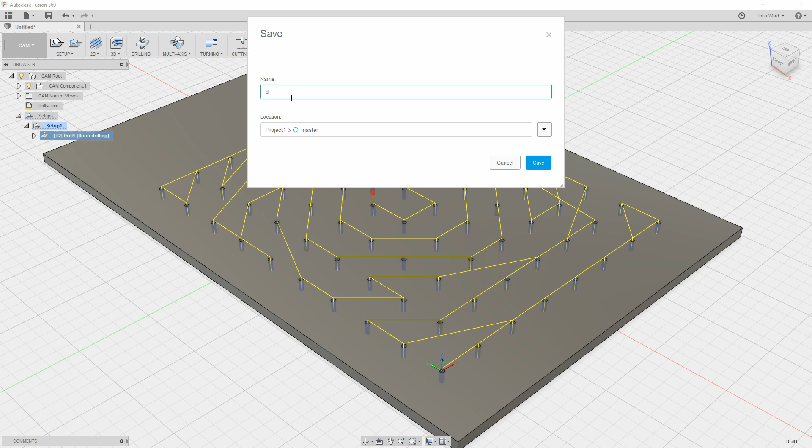And of course you would normally save this in the appropriate place. Just click save, and then you would just give it a name. In this case we'll just put drill demo, and we'll save that.

And all of this is saved in the cloud, so you can access this from other computers as well if you needed to. The whole of this works on your personal account, which you can see at the top here, and you can go to your account online and see all of the files you've saved. This thing here is to show where things get updated as and when features are changed.

So when it comes to actually using that file on the machine, what we need to first do is position the machine at the origin, or the 00 point. That uses the limit switches on the machine, around here somewhere on the actual machine. I've already put in the machine the other dimensions of the table, so it knows as far as it can move in the various other directions.

Then we just move the spindle to the 0 position here, which is the location of the first hole, and in the video that was marked with a green dot. I basically measure that with a ruler, and the end of the tool then just needs to rest directly on the top of the surface there.

So we've got the machine coordinates over here somewhere, the physical limits of where it can move to, and then we're setting the offset, which is basically this point, as the 00 for what's actually being cut.

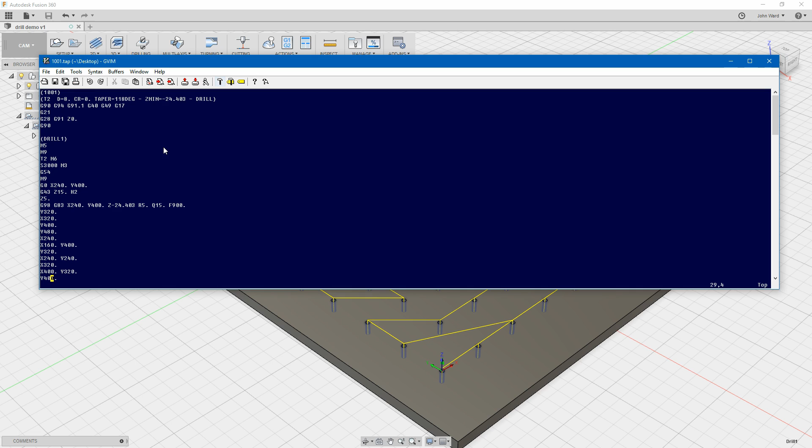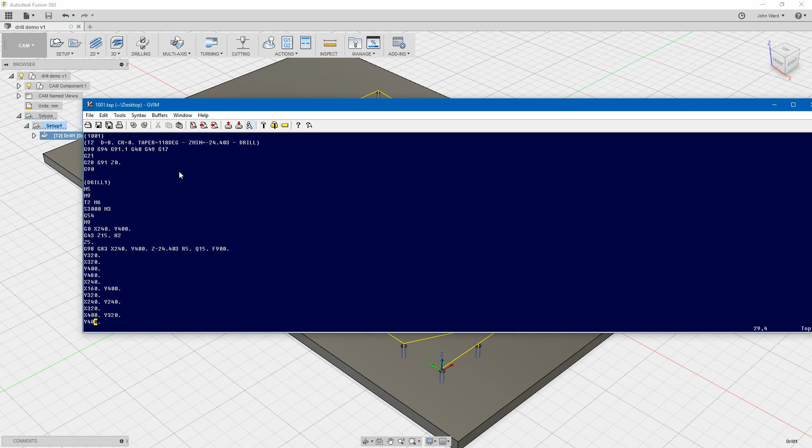And if we look at the code again, the reason it's got this strange line with G28 and G91 is that although we've set this as 0, when you've got those in there, that Z0 is actually referenced to the machine itself, so that is literally going up to the mechanical stop of 0, and then it's moving to the first hole, which in this case is in the middle, and then it switches back to the other coordinate system, which is the one based from this point here.

So essentially it's moving up as far as it can physically go, and then it switches back to the coordinates starting at this point of 0. Although that seems rather confusing, it just means it can go up literally as high as it physically can, so when it moves at high speed across the table, it doesn't have any danger of smashing into things and breaking off.

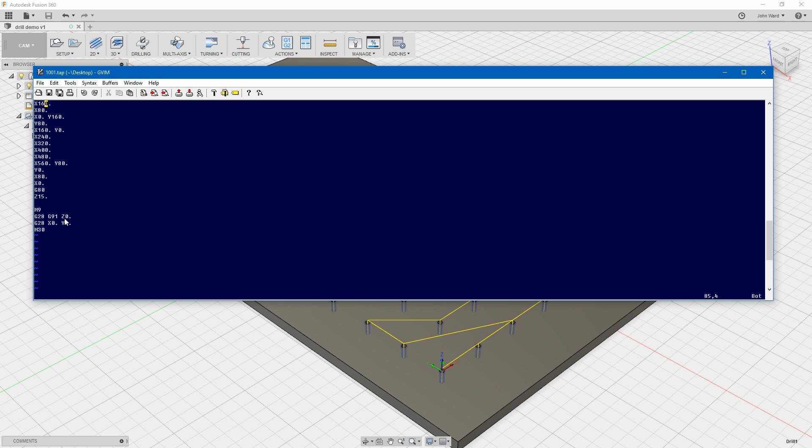And if we look at the end of the file here, we'll see again it's got the same command. So again, it's going to the highest Z position it physically can, using the machine coordinates rather than this position here.

And then it does the same again to the X0 and Y0, and because it's G28, that will come right back here. It will not end where we started out with the thing basically grinding on the top of the table. It will actually be fully retracted as high as possible, and at the 00 position, which is obviously convenient. Then you can remove the tool and do whatever else you need to do with that.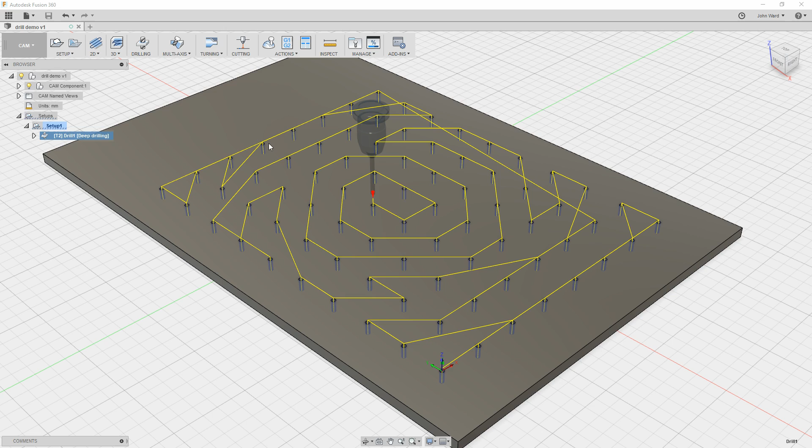So that's pretty much it for this time, and this was only a quick brief overview of the way that this was created. Fusion itself has a vast amount of stuff in it, which is far more complex than that, and we may look at some of that at a later date. But until next time, thanks for watching.